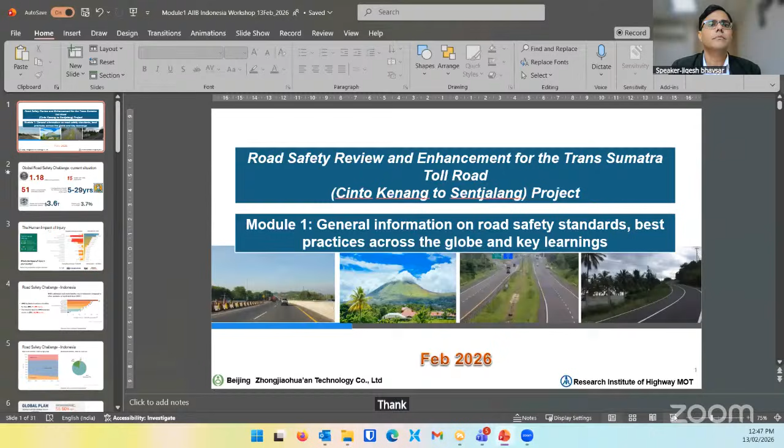Yes, thank you, thank you very much, and thank you for giving me this opportunity to speak. I'm going to share my screen. I hope you'll be able to see my screen. So I'm going to speak about general information on road safety and good practices around the world, mainly focusing on road infrastructure safety, but also touching upon other aspects of road safety, especially the safe system approach.

To start with, let me share with you the global safety challenge that we are facing. Every year, 1.18 million people die on roads because of crashes or accidents, as we know. That is about 15 deaths per 100,000 population. So 15 is the global average number per 100,000 people who die because of road crashes. That amounts to 51 million annual deaths and serious injuries. That's a huge number.

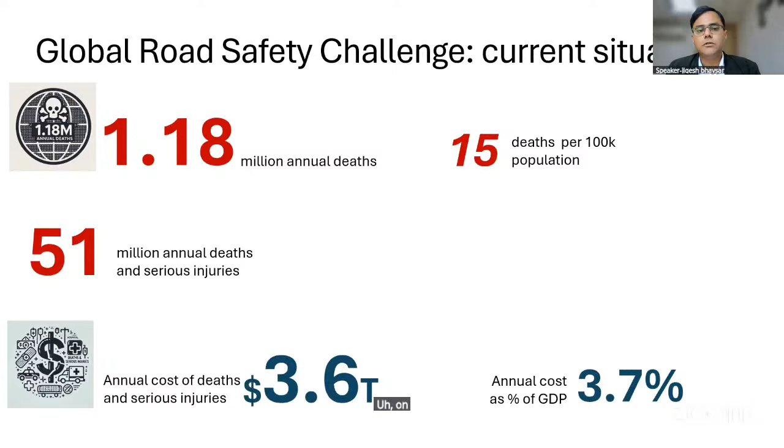These huge numbers result in about $3.6 trillion of losses, because people who die or get serious injury often end up in hospital. It becomes a burden on the health system, as well as the annual losses to the country in terms of GDP, etc. This amounts to a 3.7% loss of annual GDP on average to all countries, which is a huge loss to each nation.

However, the more worrisome figure is that road safety crashes are the leading cause of death for young people aged 5 to 29. So you can think of school-going children or young adults who just start earning in their early life being victims of road crashes. You can imagine the effect on the families. Often in low and middle income countries, this effect is more worrisome because there is a single breadwinner, and the whole family is devastated. That's the overall impact of road crashes every year.

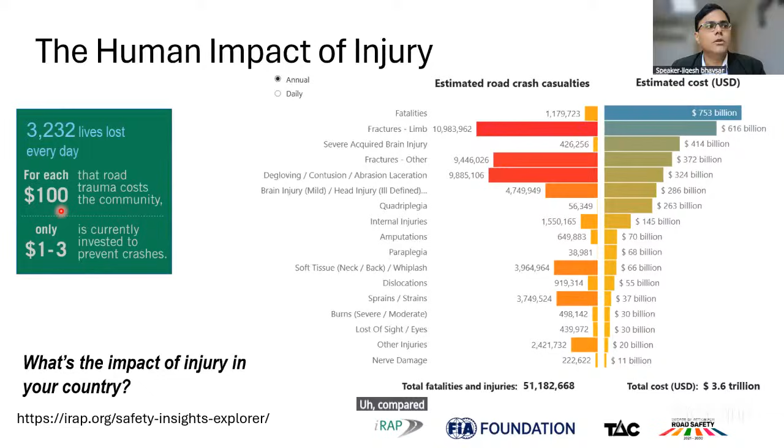On average, in all countries, for every $100 that is the cost to the community, we spend just $1 to $3 to prevent crashes, which is a very small amount compared to the losses. That's the global number.

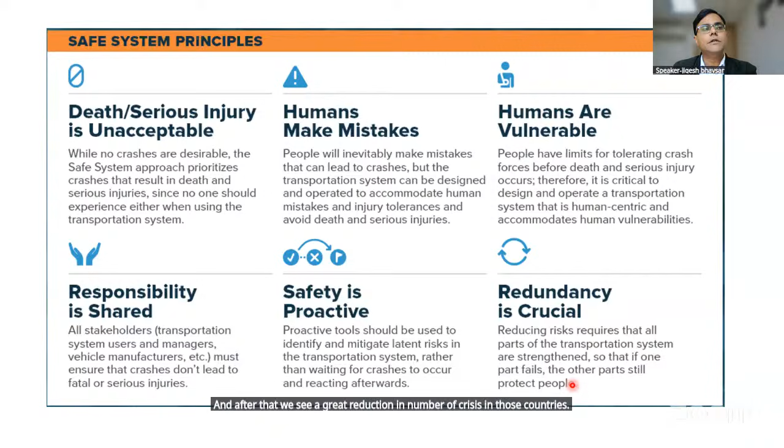So what the safe system approach basically says is that people are vulnerable and people make mistakes. We should not blame the driver for a mistake that he or she commits on the road when a crash happens. We should think that people are human, not machines - they will sometimes make mistakes. Even if we have good training of drivers, all sober drivers, not drinking, wearing seatbelts, etc., still people sometimes make mistakes, or there may be some other reason like bad weather, and a crash happens.

In such a case, how can we make sure that the outcome of the crash doesn't result into death or serious injury? Prevention of deaths and serious injuries on the roads, that is the focus of the safe system approach. There are multiple road agencies who need to work together, or often make a team and work together under the safe system approach.

So you can see safer vehicles with good vehicle technology, safer speed. We should first understand what is the safe speed for a particular road environment, and how can we implement safer road infrastructure. This involves police, road authority, and post-crash care, where when a crash happens, the victim must be taken to the hospital in a short time. So good ambulance system and trauma centers, the healthcare system, and safer road users, where drivers are trained properly through a good licensing system.

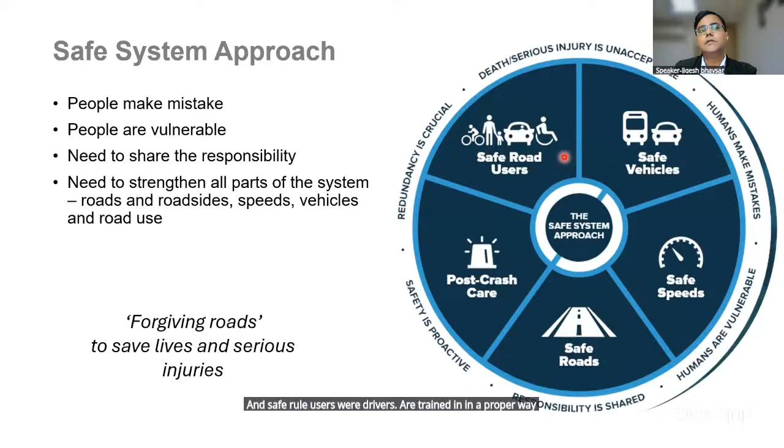All the people on the road who are vulnerable, bicycles, people on wheelchairs, etc., they are taken care of by proper road infrastructure, plus the facilities. So all these components work together as a team to avoid or reduce the number of deaths and serious injuries, and we need to strengthen all these aspects to achieve road safety.

As part of the safe system approach, we tend to focus more on a proactive approach. There are two basic approaches on road safety, particularly the engineering part of the road: reactive and proactive. Reactive is more based on crash data, or you might have heard about black spot programs. On a road, when more crashes are happening on a particular site, that is termed a black spot, and treatments or countermeasures are adopted to reduce or avoid the number of crashes. However, that is a reactive approach.

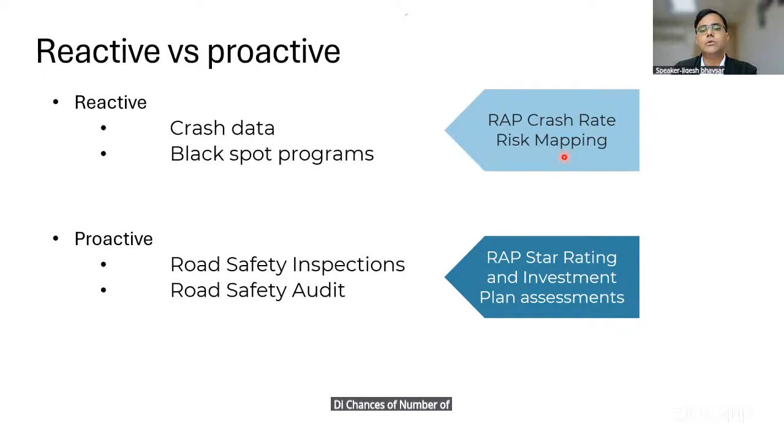The more proactive approach is road safety audit, road safety inspection, road safety assessment, where we want to make sure that a new or existing road has reduced chances of crashes by having systematic safety improvements.

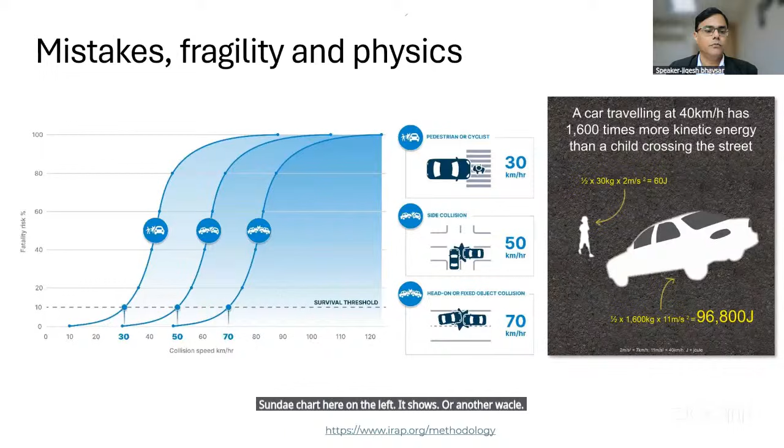Now, speed is a very important aspect when it comes to crashes and injuries. This chart on the left shows collision speed, at which a vehicle hits a pedestrian or another vehicle, and on this axis, fatality risk, the percentage chance of death. For example, a pedestrian hit by a vehicle at 30 km/h has a 10% chance of death, so 90% chance of survival.

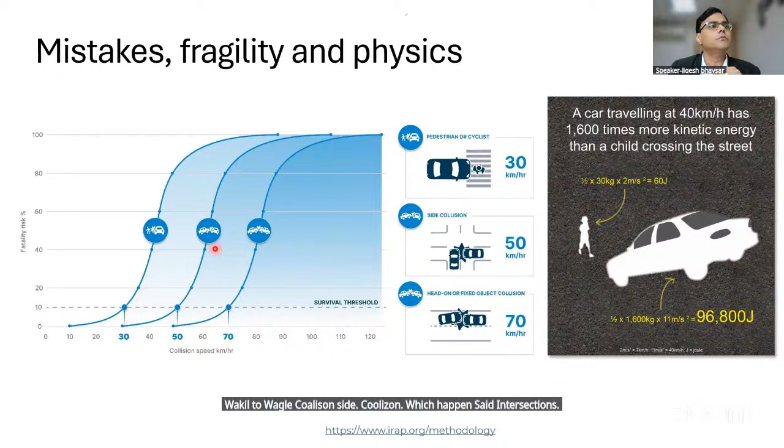At 40 km/h, about 40% chance of death. But at 50 km/h, the chance of death is very high, 80%, so very little chance of survival for the pedestrian. That's why when we have mixed use with no segregation of pedestrians, 30 km/h or maximum 40 km/h is a good approach. If we want higher speed, we'll need good facilities with segregation of pedestrians and vulnerable road users. For vehicle-to-vehicle side collision, which happens at intersections, at 60 km/h there's about a 40% chance of death.

At 70 km/h it is very high. That's why intersections are a very critical part of infrastructure. For head-on collision, 70 km/h is the limit; beyond 70, the chances of death are going to be very high.

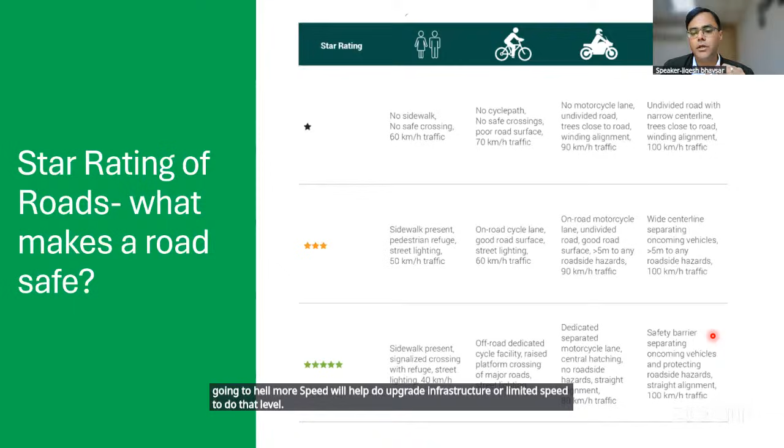For vehicle occupants, in a situation with an undivided 2-lane road at 100 km/h, it's a 1-star rating, which is very high risk. Whereas on a good road, like a motorway or a TSTR road, at 100 km/h with safety barriers between the two directions of traffic and also on the sides, it gets a 5-star rating, which is safer infrastructure. So based on the type of road infrastructure, we can say what speed is safe. If we want more speed, we'll have to upgrade infrastructure or limit the speed accordingly. This is a good indicator to help us understand what the safer speed is for a given situation.

Also, having good infrastructure data, a good level of infrastructure data, is very helpful. This is particularly from IRAP assessment in some countries in Europe.

So what it shows is plotting multiple layers of data, like where speed limit is more than 50 km/h, we have pedestrian crossing like the one shown in the photograph, at-grade pedestrian crossing, just a zebra marking, multiple lanes. You can see 4 lanes of the road, so pedestrians have to cross a very wide lane. 4 lanes is very wide for a pedestrian to cross, and it's undivided, so there is no refuge in between. So when you enter the road, you have to cross, and you can see here, the pedestrian probably cannot see if there is another vehicle approaching from this side.

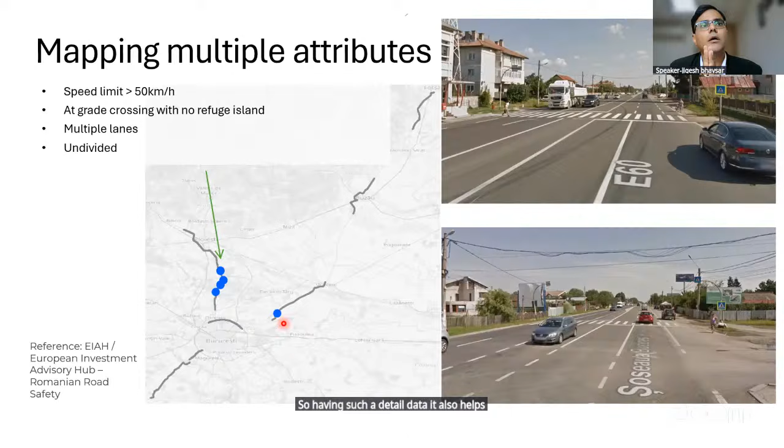That type of combination of high risk parameters helps us identify such high risk locations on the site. There are multiple other parameters as well, like curvature without signs and marking, and nighttime, which is going to be very high risk, particularly on high risk roads and so on. So having such detailed data also helps identify such high risk situations.

Now there are several international good practices available when we talk about safer road infrastructure. There's Austroads in Australia, DMRB from the UK, and PIARC, CAREC for the Central Asia region, and so on. What they talk about is not just geometric design, though that is obviously very important, but also speed management in urban or rural areas, plus the concept of roadside hazard management.

This is very important, particularly for high risk roads - the crash barriers and clear zone concept, etc. Also the process of risk assessment on such roads - UK and Australia have very good road safety audit guidelines, a systematic process. Also the safe system assessment framework is widely used in Australia. So we have some good practices available internationally, and these need to be adopted as a benchmark in addition to the national standards. Like in Indonesia, where national standards exist, in addition to those, we can look at such good practice available to make the road design safer, and operation also.

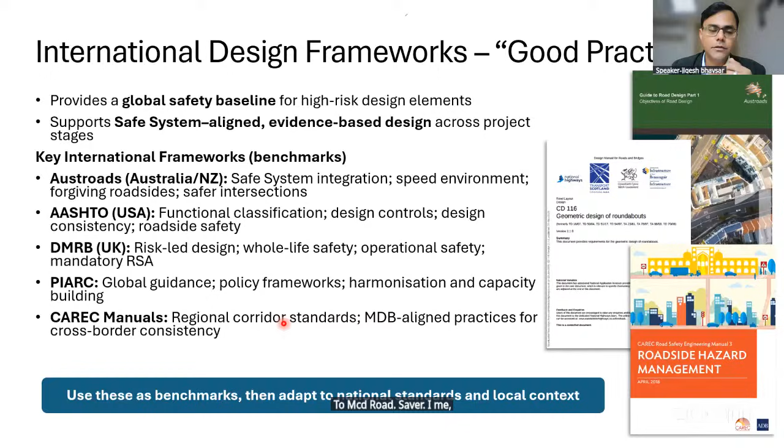Now, star rating of roads at the design stage - particularly what Han is going to talk about in the next module, star rating for design, SR4D. The Asian Development Bank has put together a good manual for the CAREC region, that is the Central Asian region, combining star rating for design and road safety audit.

So you know that when designs are being prepared, typically a road safety audit is conducted. The design goes through the process of road safety audit by an independent party. How can we complement this process with star rating of the road design? This is what this guide provides guidance on. There are 3 levels of integration possible.

Level 1 is very quick, where you have such cross sections from the design, and we can do star rating of such cross sections. Level 2 is full length star rating - the full length of the road based on the design drawings and documents. That is what we have done for the TSTR link under this study. Level 3 is star rating plus fatality estimation.

So if we do the existing road before improvement, full star rating, and then do design star rating, we can compare the existing road versus the design. This process, in addition to the road safety audit, is very good, and both complement each other, because road safety audit gives a more detailed perspective which the automatic star rating system may sometimes miss. Road safety audit is also a very good detailed approach, and under this study, we have done road safety audit as well. So that's a way how we can complement the process of road safety audit.

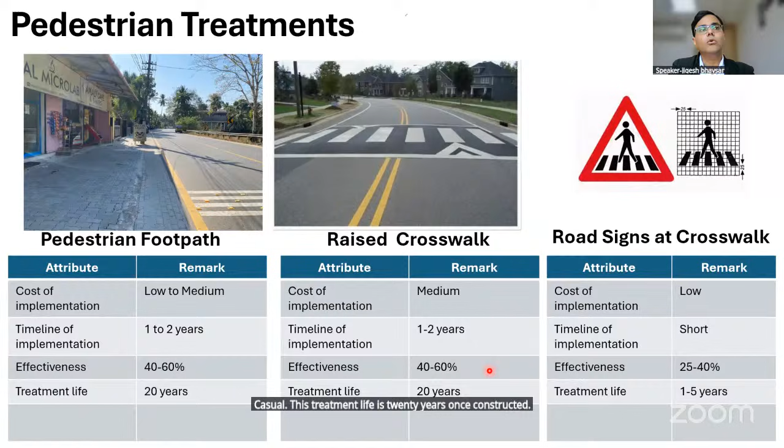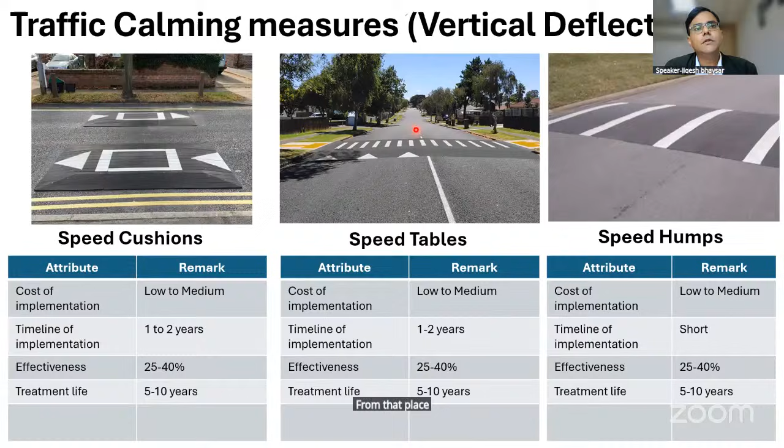Traffic calming measures include vertical deflection, where vehicles have to slow down to pass through, for example speed cushions, which allow bigger vehicles like ambulances and school buses to pass through without the hump. Speed tables make all vehicles slow down and go through, and as mentioned, pedestrians can also cross from that place. Speed humps are the traditional circular arch type.

Then there's the traffic calming measure in terms of horizontal deflection, where a road narrowing effect gives drivers the perception that the road is narrowing, so they slow down. There are certain gateway treatments with different types of markings and signs, giving a gateway effect so drivers know they are entering a village or urban area and need to slow down.

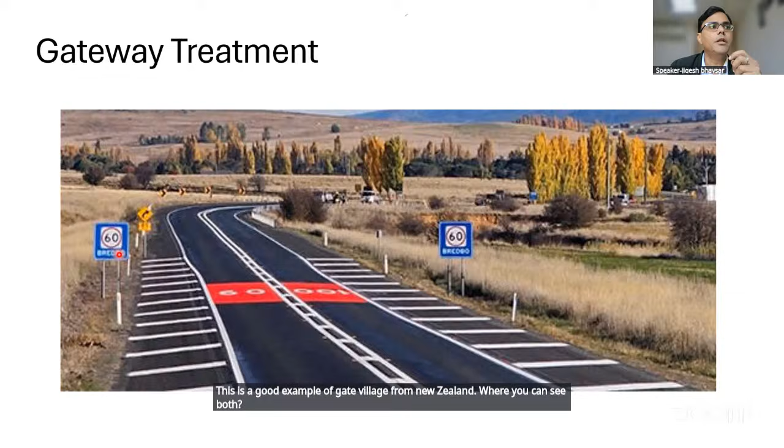This is particularly useful when a highway passes through a built-up town or village. We can also have a central island to create that slowdown effect. This is a good example of a gateway village from New Zealand, where on both sides you see the speed limit sign with the name of the town being approached, and speed limit also marked, telling the driver they are approaching a village or town and need to slow down.

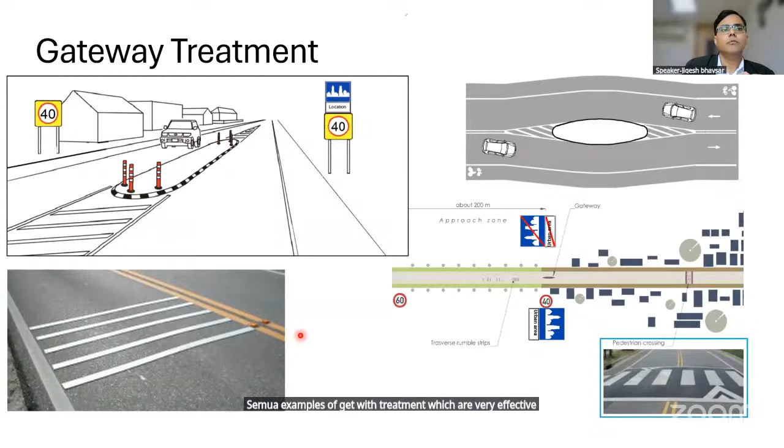Some more examples of gateway treatment, which are very effective when a high-speed highway passes through a village or town, having this kind of signage on both sides, plus a central island with rumble strips on the road, or different shapes of islands - that is very effective.

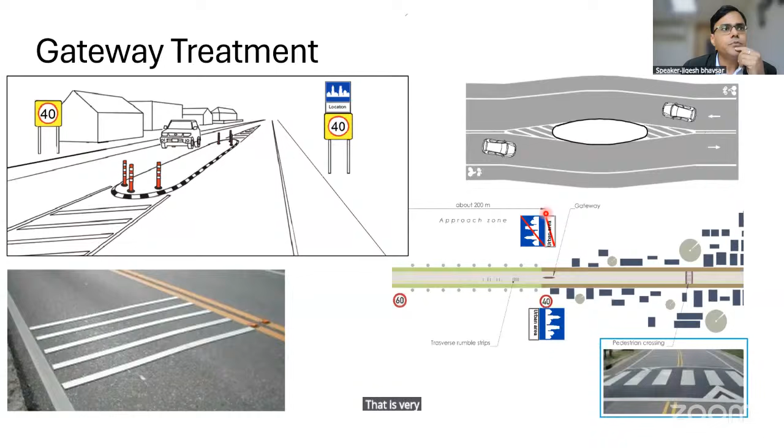Runoff crashes occur where more crashes happen when vehicles go off the road, and this is very serious on hill roads, where crash barriers can be very helpful to reduce them. Also, with good signs and markings, we can improve that situation.

Clear zone treatment, based on traffic volume, speed, and class of the road, requires a minimum width ranging from 3 meters to 10 meters where no hard object is present, so when a vehicle goes off the road it doesn't collide with such an object, improving the situation.

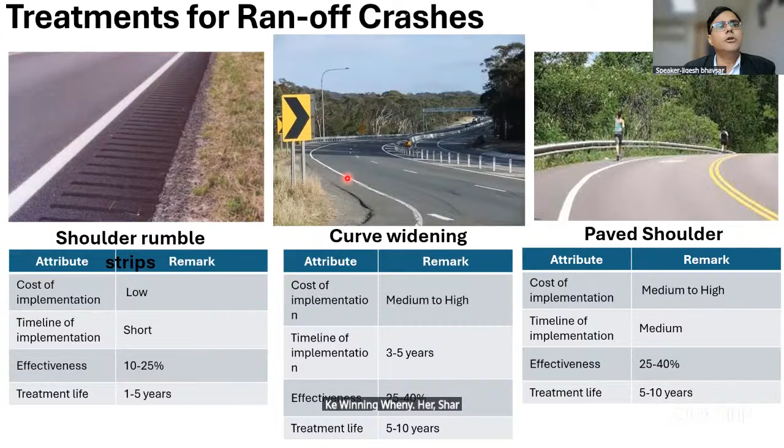Shoulder rumble strips are again very effective. Curve widening, when you have sharp curves, helps with a little bit of widening. Paved shoulders are very effective as well.

Treatments which help reduce head-on crashes when an undivided road has vehicles traveling in opposite directions include different treatments like center line rumble strips, and climbing lanes on hill roads so faster vehicles can use that extra lane to overtake slower vehicles. Good center line markings are also helpful, and there are a variety of center line markings.

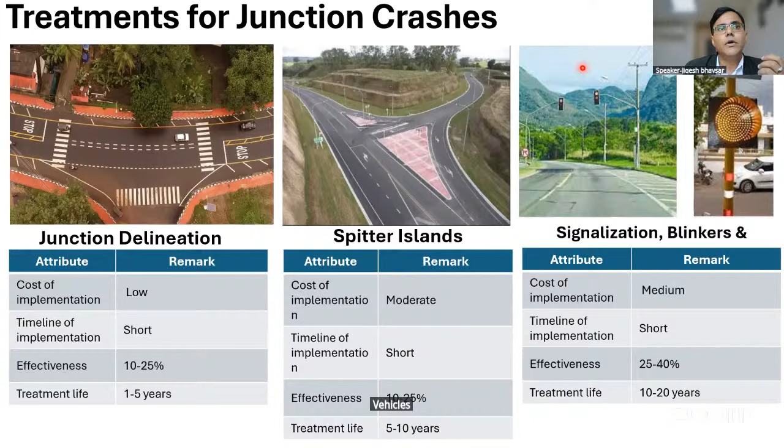To improve junction safety, channelizing is very important - you can see the markings and channelizing islands at the intersection that help regulate movement and reduce conflict between turning vehicles. Signalization is very helpful, and blinkers alert drivers in advance that they are approaching an intersection. Roundabouts are also very important and reduce conflict by a great amount, so having roundabouts on highways and in urban areas is very helpful.

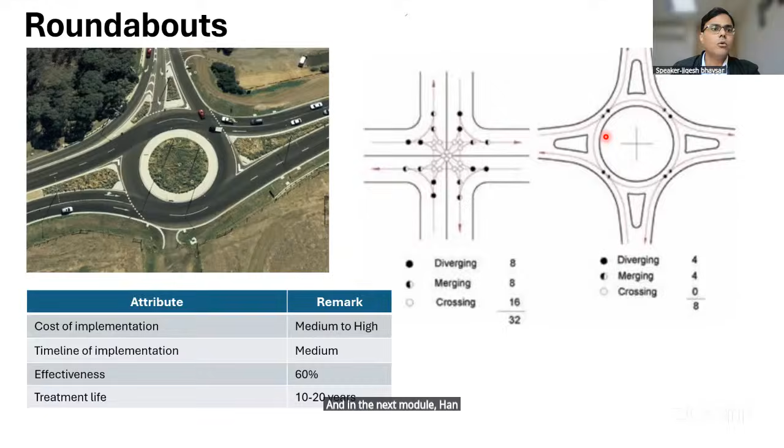These were some of the good practice solutions I wanted to share with you. In the next module, Han is going to talk more about how we have assessed the risk on the TSTR link design and given solutions using the road safety audit and star rating for design approach. Thank you very much, any questions? I'm happy to answer.

So on module 2, I'm going to talk about the project specific discussion on the design review and compliance, gaps and mitigation measures for the road safety review and enhancement for the Trans-Sumatra toll road from Cinto Kenang to Sentjalang project.

The scope of this link 15 is about 198 kilometers from Jambi to Rengat. The objective is to review the detailed engineering design for road safety provisions and provide recommendations to enhance road safety aspects. The methodology used is what was just discussed: the International Road Assessment Program.

The IRAP star rating for design, SR4D, also incorporates the road safety audit RSA methodology of the DED, to achieve Indonesia's MPWH Regulation Number 4, 2023, that mandates a minimum 4-star IRAP star rating, safety rating for all national roads and expressways.

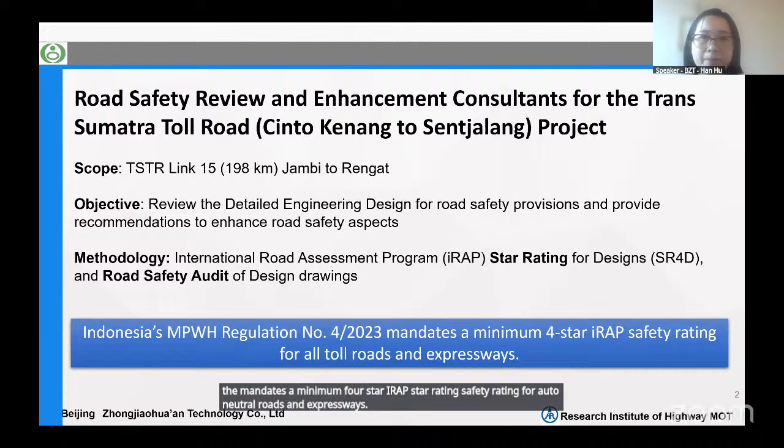Let's take a look at the entire stretch of the road. There are 4 interchanges from Cinto Kenang to Rengat, and there are 4 lanes, 2 lanes in each direction, and the total typical road width is 25.9 meters.

That comprises a lane width of 3.6 meters, 1.5 meter inner shoulder width, and 3 meter outer shoulder width, with 2.6 meter median width, including the median barrier width.

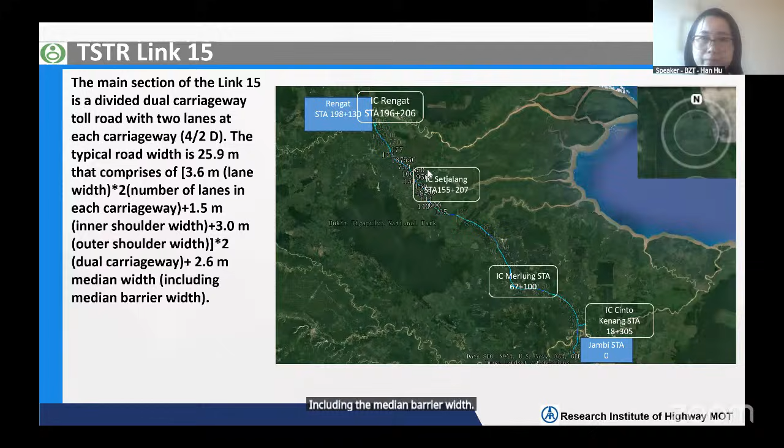So what we have done is, first we implemented the road safety review of the DEDs. The workflow is we took the data of the TSTR link 15 DED and other reports, done the pre-audit checks, checked the status of work and road functions, and then reviewed road safety aspects to review the road safety design features and identify the potential safety issues.

And then we formed the road safety review report, listing all the safety concerns with the level of risk and the priorities, and then recommendations to mitigate the risk.

After that, we provided the review report to our clients, and then met with the project manager and designers, the PTHK, to discuss the safety concerns and recommendations for them to change, and how these measures will be implemented in their design improvements.

After that, we implement the SR4D work procedures, which I have introduced before. We circle this, and then we have the target that is the 4-star rating to optimize the star ratings of the entire road stretch to reduce the deaths and serious injuries, since even new roads can probably cause potential fatalities if we don't design them properly.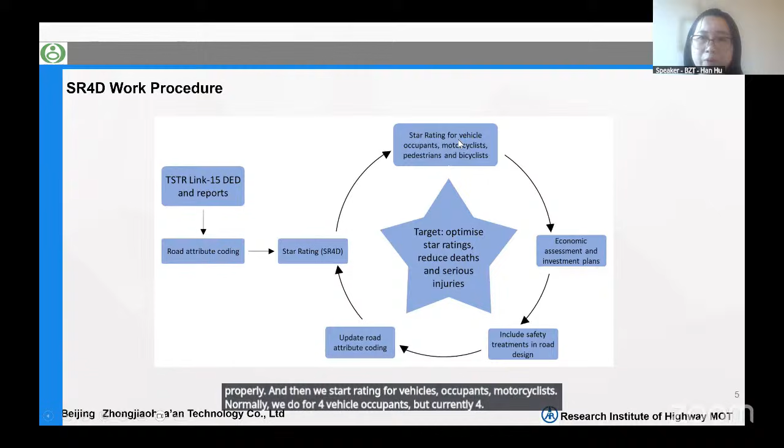And then we star rate for vehicles, occupants, motorcyclists. Normally we do this for 4 vehicle occupants, but currently four groups of road users. For this project, we only do the star rating for the vehicle occupants.

And then we implemented the economic assessment and investment plans, including safety treatments in road design, and then update the road attribute coding, forming this entire circle. We call it SR4D.

So the SR4D road attributes coding includes the roadside, mid-block, intersection, flow, and vulnerable road users, facilities, and land use, speeds, and extras.

So for roadsides, for example, we code the roadside objects and their distance to a road lane, and then the paved shoulder width, paved shoulder rumble strips, and whether they are available.

And for the mid-blocks, the attributes we usually code are the numbers of lanes and lane widths, whether there are any service roads, the curvature and quality of curvature, the grades of the roads, the slope, median type, center rumble, skid resistance, parking space, sight distance, and lighting.

And for intersections, we code the intersection type, the quality of the intersection, channelization, intersecting road volume, and also for flow, we code the annual average daily traffic and peak hour flow, pedestrian along and cross flow.

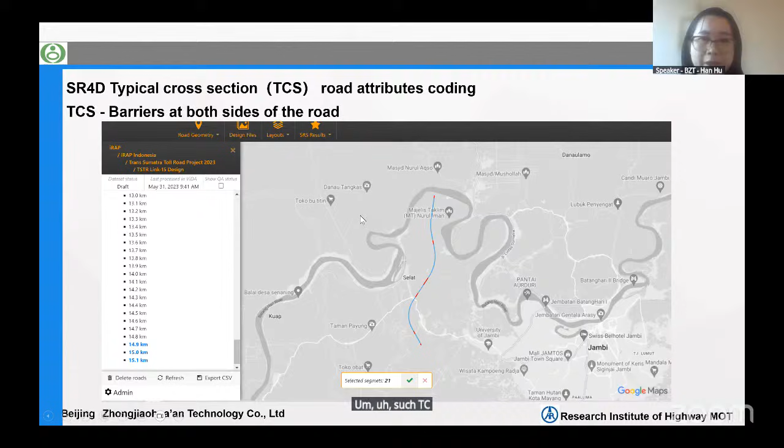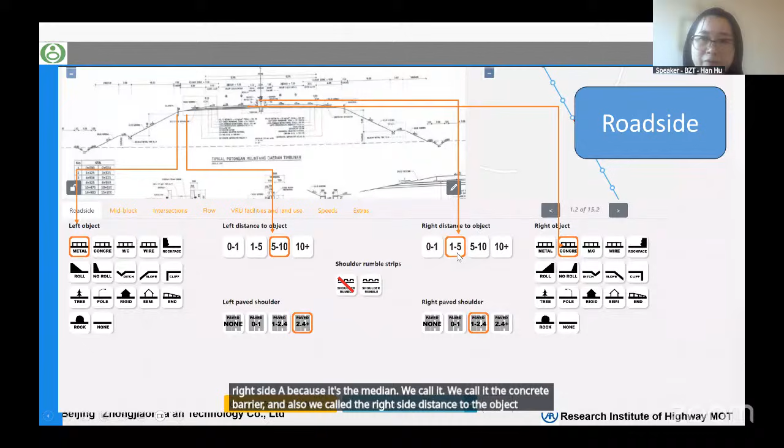In the roadside group, we coded the roadside left object as the metal barrier, with left side distance to this object being 5 to 10 meters. We also coded whether there are shoulder rumble strips. For the right side, it's the median, coded as concrete barrier, with right side distance to the object at 1 to 5 meters, and the right side paved shoulder at 1 to 2.4 meters for this typical cross section.

For the mid block of this typical cross section, we coded the number of lanes, and lane width as wide, curvature as straight, and curvature quality as not applicable. The median type is concrete, and skid resistance is sealed since it's a new road, representing good condition. Parking is coded none, grade is 0 to 7%, road condition is good, there are no roadworks, sight distance is sufficient, there's no service road, delineation is good, center rumble strips does not apply, and lighting applies here.

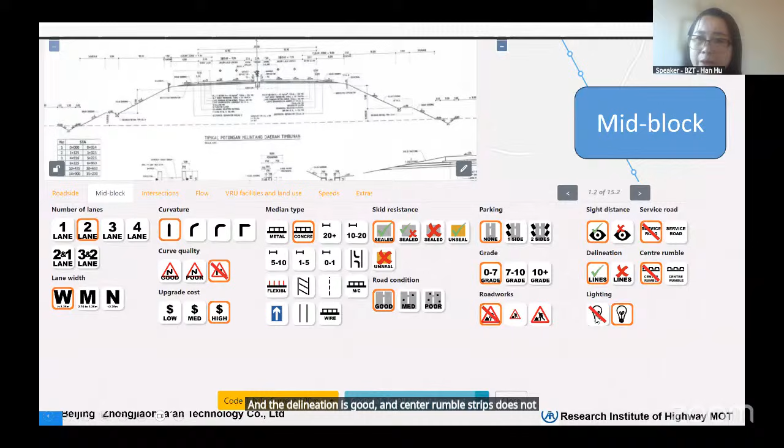For the intersection here, there's no intersection at this part, so all these attributes are not applicable.

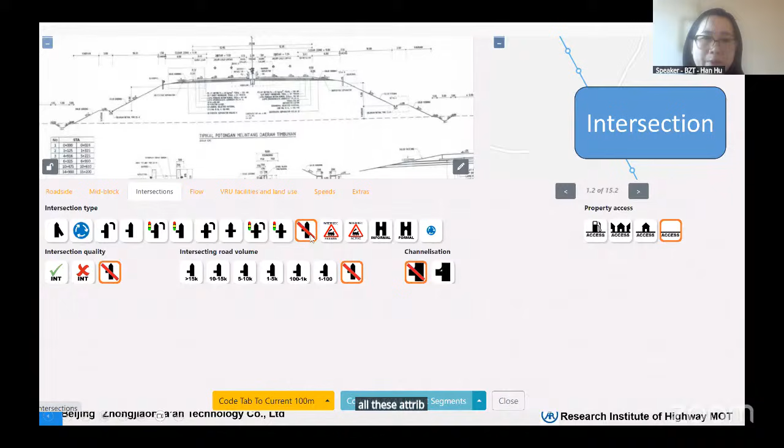For the flow here, because it's a toll road, there's no motorcycle and no pedestrians, no pedestrian crossing flow, no pedestrians walking along the road, and also no bike flow.

We use this AADT as we got the basic concept design from the PTHK that they provided us. We use 5,791 vehicles as the AADT.

The AADT represents the exposure of how many vehicles are exposed to this traffic. If it's a large number, that means more exposure and more risk that the vehicle occupants are facing on these road sections. So it often will influence the results of the star rating and the safer road investment plans, as it will generate more fatalities.

For the VRU facilities and land use here, since the left-hand side land use is pure farmland, we code there's no sidewalk and no crossing on this inspected road, and no crossing at the side road, and obviously no sidewalk on the right side. There's no motorcycle facilities on these toll roads, the area type is farm, and there's no crossing facilities for vehicles, no crossing facility quality, no fence, and for bicycle facilities and school zone, these are all the attributes.

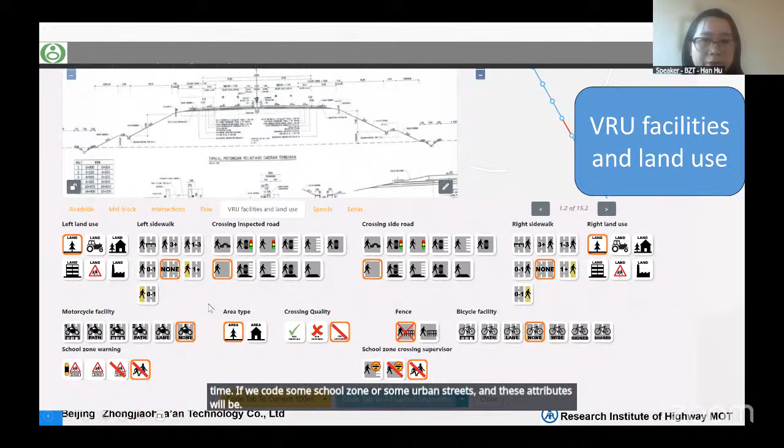We have a summary table of the TCS, particularly for barriers at both sides, because in most cases on this TSTR link 15, both sides have barriers. For the driver's side objects, it's a concrete barrier at 1 to 5 meter distance. For the passenger side objects, which is the left side, it's a metal barrier at 5 to 10 meter distance. The paved shoulder width is wide - at passenger side it's more than 2.4 meters, and driver side is 1 to 2.4 meters. There's no shoulder rumble strips.

For the mid block, the median type is divided road with a concrete barrier at the median. There are 2 lanes each carriageway, curvature is gently curving, delineation is adequate, and lighting is yes. For intersections, there's no intersection, and the flow info is 5,791 AADT. Land use is undeveloped, speed limit here is 100 km/h, and operating speed at this section uses the 85th percentile speed of 110 km/h. Speed management here is nil, and speed differential here is nil.

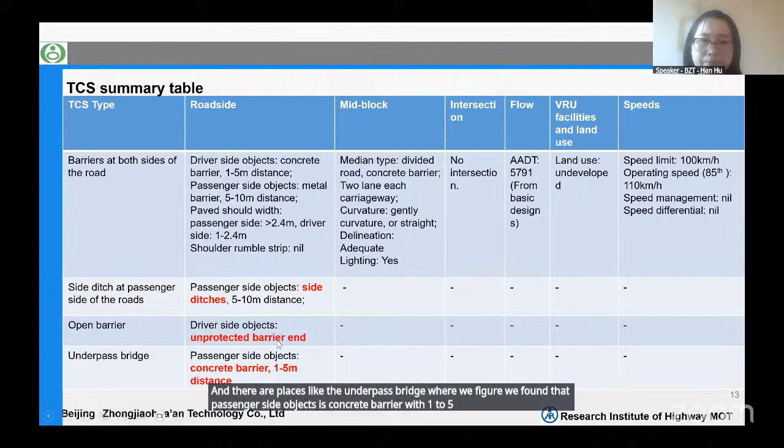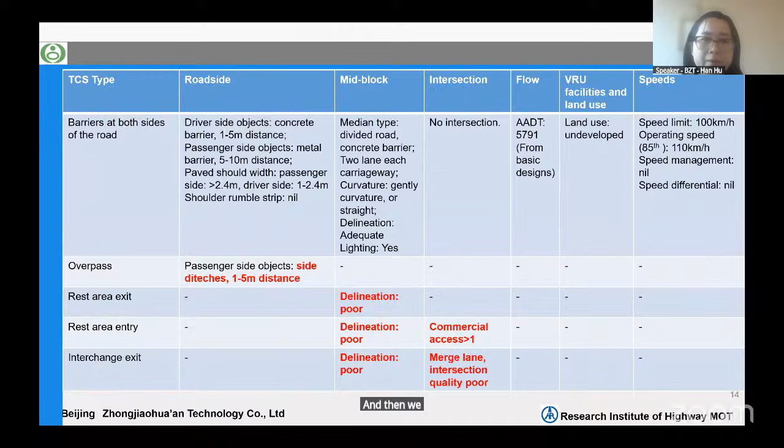This is the summary of the TCS, the typical cross sections of the entire TSTR link 15. We implement these inputs into the TSTR link 15 design review, using iRAP's star rating for design method, including safety treatments in the design. The output will be the revised and safer design with a 3-star or better rating.

The safer new roads should be constructed, and the outcome should be the reduction in deaths and serious injuries, with the impact being long-term economic benefits and less burden on the health system.

As introduced, the UN's road safety goals involve public health, law enforcement, and road authorities. So we, as road authorities and designers, have to fulfill our obligations.

Our design must make it possible to identify safety treatments or improvements under multiple options of available investment plans. We calculate that the economic benefit of the safety treatment must at minimum exceed the cost of its construction and maintenance—that is, it must have a benefit-cost ratio, the BCR, greater than 1.

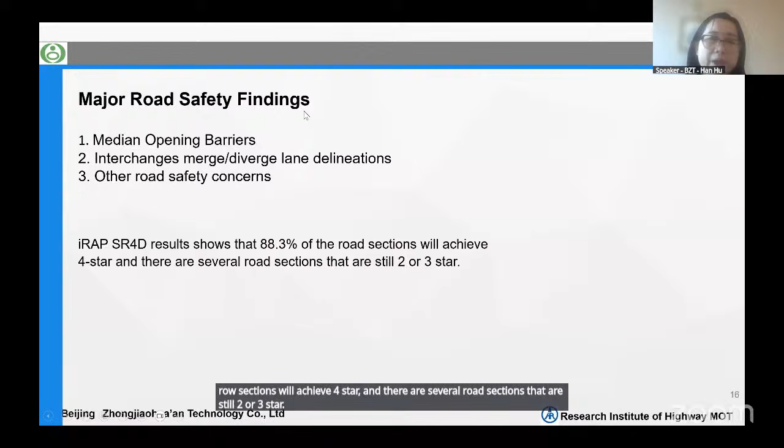For the median openings identified in the previous TCS analysis as barrier openings, these serve as U-turn provisions for emergency vehicles. In the current design there is a collapsible barrier in the median, and there are about 31 such openings over the 198 kilometer road length of TSTR link 15.

The collapsible barrier in the present design is a concern for road safety, as in a high-speed collision it will generate runoff crashes and the vehicle may cross to the other side. These collapsible barrier ends connecting with the concrete barrier in the median are not safe for high-speed collision, and there are 31 such U-turns across the 198 kilometers.

An example of the star rating analysis for this median U-turn, median opening for emergency vehicles: the operating speed is 110 kilometers per hour, which gives a 4-star rating, but the driver's side object, the unprotected barrier end, makes it 1-star or worse.

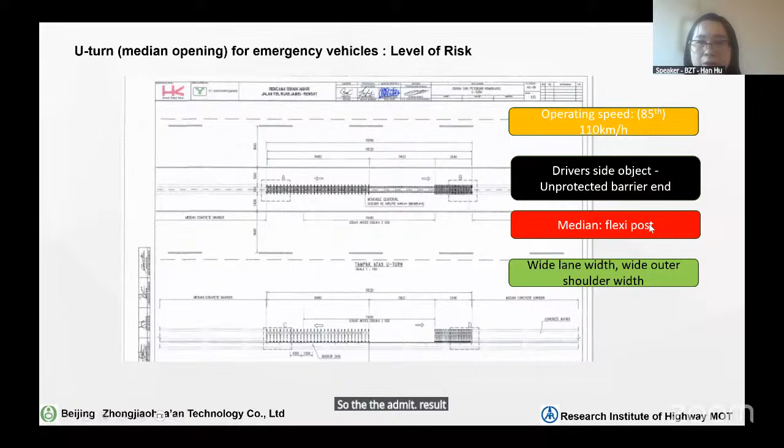The median flexi-post makes it 2-star risk, while the wide lane widths and wide outer shoulder widths provide clearance making it 5-star for those sections. So the ultimate result of this cross section is 2-star.

For the interchange merge and diverge lane delineations, signings, markings and visibility, we identified that for rest areas and interchange exits, directional signs should be placed at 2 kilometers, 1 kilometer, and 500 meters. The current designs use intervals of 1 kilometer and 500 meters.

A second issue is that we should install wet reflective markings and rumble strips to improve lane discipline in rainy and nighttime conditions, and adopt a graded speed limit scheme, reducing speed from 100 km/h to 70 km/h, then to 40 km/h, to safely transition drivers into the divergent lanes at interchanges.

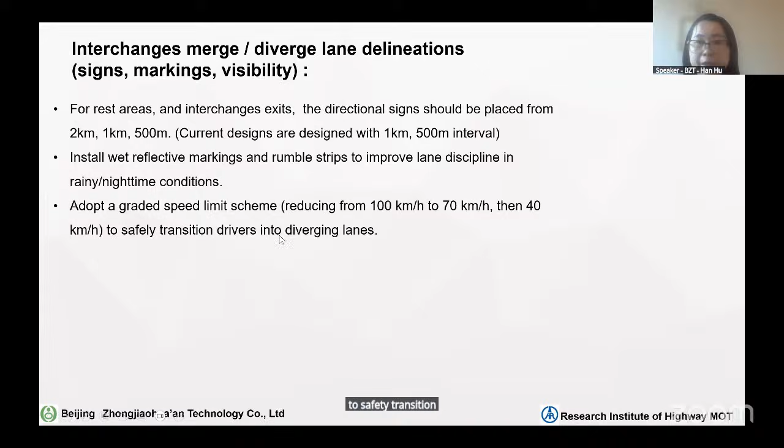Regarding the risk level of the interchange merge and diverge lane delineations for signs and markings, here's an example: the operating speed is good, but the divergent place—the intersection diverge lane and poor channelization—has what we call poor delineation. The good part is that roadside barriers on both sides of the road are designed, with wide lane widths and wide shoulder widths.

And this is the star rating map of the TSTR Link 15, Jambi to Rengat, for the vehicle occupants. On the left side, you see the smooth star rating, where 4-star is 99.2 percentage of the road length.

And then on the right side is the raw star rating, which only 88.3% of the road length is 4-star, and there are the rest of the sections are 2 or 3 stars.

So what we mean by the smooth star rating is we merge the homogeneous sections of the road, each 100-meter road sections, so that there are probably some sections that are 3 stars, but the adjacent homogeneous sections are 4-star or 5-star or better, and then the smooth stars will be 4-star.

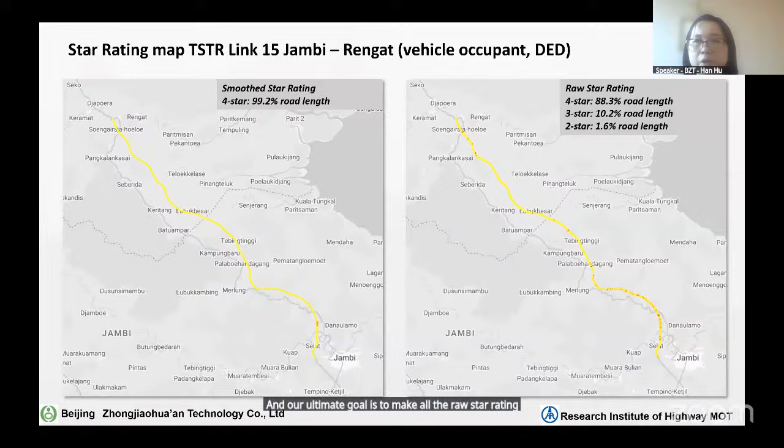So the safety concern here is opening for emergency vehicle access, and the recommendation is to adopt a safer barrier type. There are about 31 sites.

And the second issue is the merge and diverge lanes of the interchanges, to improve the signs and markings and also the crash barriers. There are 8 sites. And also speed enforcement, and if there is any possibility to make sure the places are well placed with speed cameras.

And this will show that the current DEDs, the star rating that you have seen, there are about 10%, 12% of the roads are still 2 or 3 stars in terms of the raw star rating.

And with our improved recommended treatments, we can eliminate the 2-star ratings here. But still, there are road sections that are still about 10% of the road in 3-star ratings.

But if we can add some speed enforcement, we can make all the road sections for the smooth star ratings 100% 4-star ratings, and for raw star ratings we make it 99% of the road sections into 4-star ratings. That's almost 100% of the length achieving 4-star ratings or better.

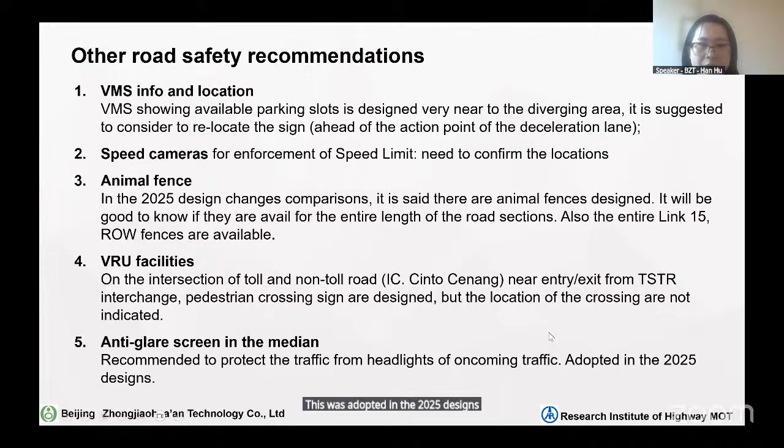And we also recommended for work zone safety, we should shift to a safe system and risk-based approach, and adopt the CAREC 6-zone work zone model, from early warning to advanced warning and taper and mandatory safety buffer, and then work area and then termination.

And also the hierarchy of controls, engineering first to eliminate risk where possible, to improve the crashworthiness of the barriers and also the TMAs, and also the administrative controls.

And for mandatory speed management, 40 kilometers per hour in active work zones is mandated. And from a step-down speed reduction, 20 kilometers per hour increments of this step-down speed reduction. We also encouraged automated enforcement and regulatory speed signs.

For the positive protection of workers, we recommend adopting MASH and also EN 1317 compliant barriers, and also for TMA, truck-mounted attenuators are mandatory on high-speed sections, and water-filled barriers are for delineation only, they are not for protection.

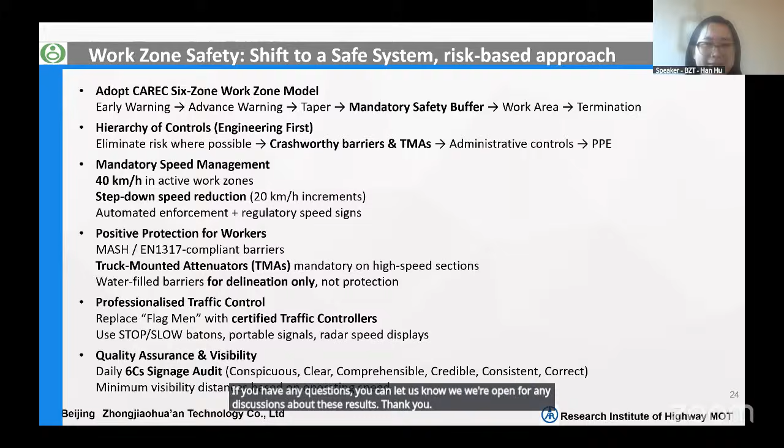Okay, thank you, Ms. Han Hu. Okay, thank you for the presentation. Maybe Ms. Han Hu's mind is on the Chinese New Year, yeah, Ms. Han Hu. But now we will have a discussion session. Is there anyone to raise your hand to have a question or statement?

If not, maybe I will read the question from the chat. Maybe Ms. Han Hu or Jikes can answer this one.

First discussion is about the motorcyclists. Given that motorcyclists represent the largest proportion of road crash victims in Indonesia, and that toll roads exclude motorcycle traffic, should national road safety strategies prioritize intervention on non-toll urban and arterial roads over toll road upgrades? Do you have any comment, Pak Jikes?

Yes, I can answer this one. Good question, because when we say that 80% of the deaths happen with motorcycles, why don't we just focus on motorcycles? However, I would like to say that it should not be seen as a prioritization where we take action. I think the National Road Safety Policy also says that on toll roads, the fatality rate is more than non-toll roads. What that means, if 100 crashes happen, how many people die?

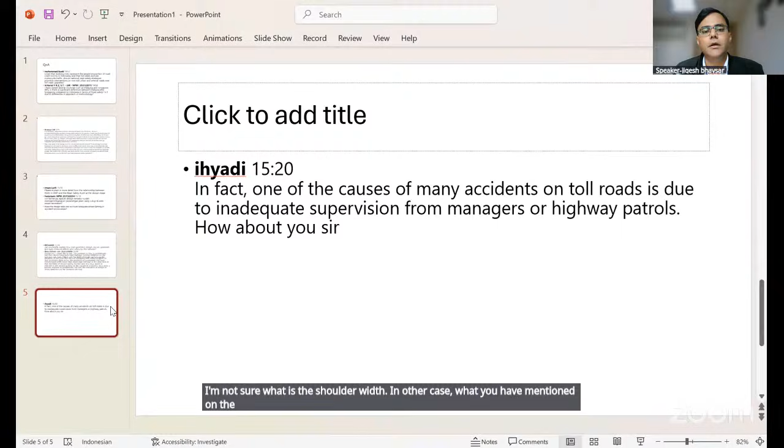Okay, next question. Please explain in more detail the relationship between RS4D, iRAP, and the road safety audit at the design stage. This is new for us, starting road safety audit. We already use what Han explained, we saw before, like the iRAP demonstrator, right? The iRAP demonstrator is similar to RS4D, but how about the road safety audit? It is new for us.

Can you explain? Yes, so in simple terms, a road safety audit is when a road safety auditor reviews the design drawings and then gives recommendations or observations, but there is no quantification of risk. So when I look at a design drawing and say there is some risk here, how much is the risk? That I cannot tell. When I say you need to change these features to improve safety, I cannot tell what level of safety improvement we are going to bring.

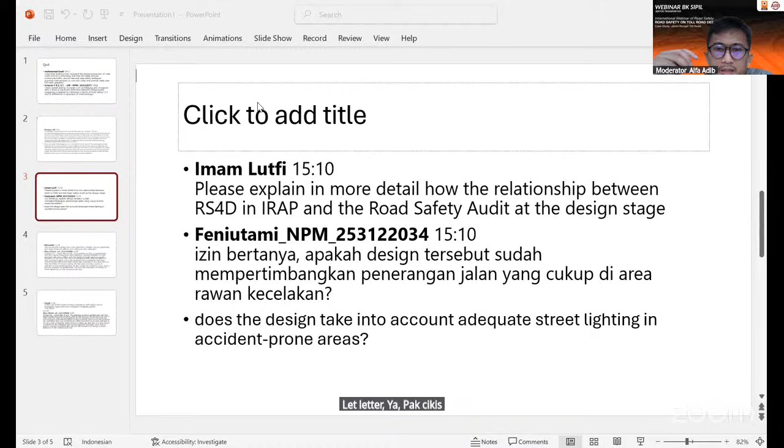I think this topic is very interesting—maybe we will discuss it later, Pak Jigesh. In Indonesia we already use star rating, but with a different approach compared to road safety audit, because for star rating a junior engineer can do it, but for road safety audit it should be an expert with long experience.

Next question: does the design take into account adequate street lighting in accident-prone areas? About lighting, do you have any comment?

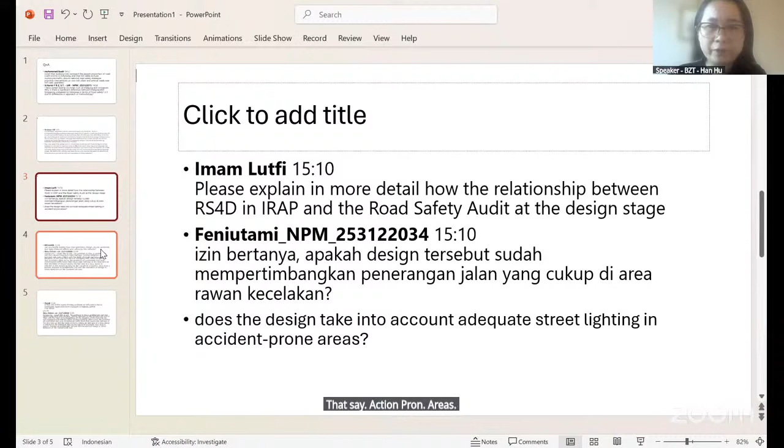I think the entire sections are designed with sufficient lighting according to our observations of the designs, and there are not so many accident-prone areas, given that the design and alignments are good.

Jigesh, maybe you can also make some points? Yes, streetlight, I think these are present. However, when we talk particularly about the star rating model, streetlight gives benefit to pedestrian safety. So if we think about two cars and their risk, streetlight versus no streetlight, in star rating it's not considered—it is the same. But when you have pedestrians and compare streetlight versus no streetlight, there will be a difference in pedestrian safety rating. So streetlights are no doubt important, and perhaps you can say that's a limitation of the star rating model.

But in reality, streetlights are helpful. Also, sometimes on high-speed roads, I have seen streetlights introduced in some sections to break the monotony of driving, particularly at night—not on the entire road, just some sections. And if there is a known history of crashes on certain road sections at night time, probably having street light will help address that situation.

Okay, next a short question from Pak Richard, but maybe the answer will be long. Can you briefly explain how road geometric design, such as curves, gradients, and sight distance, affects user safety for this toll road?

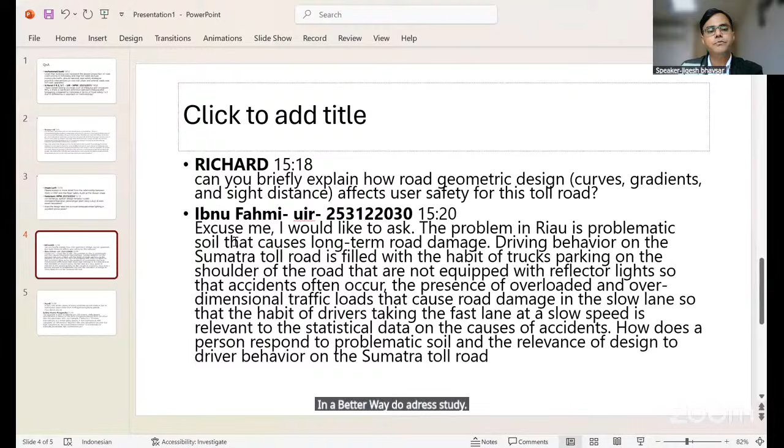I also want to add a point. Although I'm not a pavement expert, I have some working experience on this topic. Have you tried, using the AASHTO design method, or your local Indonesian pavement design method? Sometimes other countries' design methods may not apply to your case, even if the road is properly used with no overloading, because of local conditions of materials, availability, and lab tests, other combinations of pavement design can be applied. We can discuss later to see if your materials using other design methods can achieve better performance. That's for your reference, some suggestions.

So the code should be tailored to the Indonesian situation, right? Yes, recently our institute has worked with a lot of other countries abroad on topics of road pavement and design. We have a big lab here, and we recently helped other countries test their materials, because that country adopts AASHTO methodologies, but the performance of the pavement doesn't achieve what they want. So we said maybe you don't have to always listen to the CBR or AASHTO method.

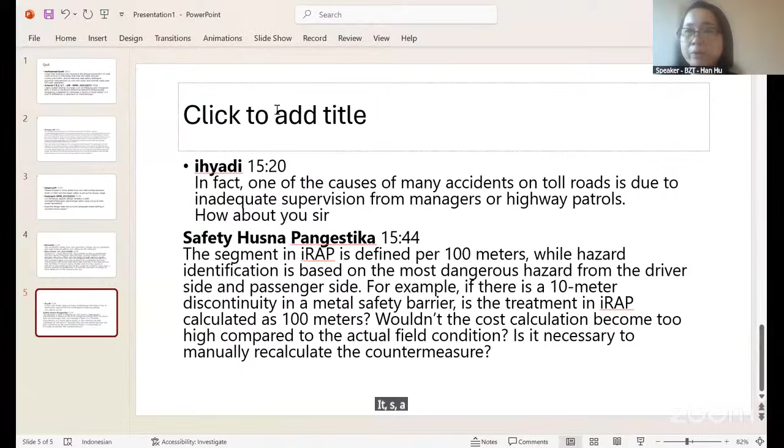You can try to let them give us their materials. So we imported their aggregates and asphalt, and helped them use other design methods to improve their aggregates, like the compositions of the aggregates. By doing that, the performance of the road pavements was achieved. I'm not an expert, but I talked to the leaders about what they achieved, and they said this whole situation is global, so maybe one method cannot fit all cases. Each country has their own issues and situations to think of. This is the suggestion from me.

Okay. Next question from Ihyadi. In fact, one of the causes of many accidents on toll roads is due to inadequate supervision from managers or highway patrols.

Yes, I think... your recommendation is basically about the road pavement, road inventory, or the physical road. But actually the accident factor comes from the physical road, the vehicle, and the user. In your recommendation for the Jambi Rengat road, is there any recommendation related to enforcement or speed control and something like that? Do you have any response?

Yes, we have recommended speed enforcement in the star rating for design. We have done a scenario - Han can correct me - we assumed or adopted 110 kilometers per hour as the 85th percentile speed, with a speed limit of 100 kilometers per hour. But without a good enforcement system, because this road is going to be very nice which encourages speeding, people will generally drive 10 kilometers per hour above the speed limit. So we modeled that if people drive at 110, what is the safety outcome, star rating, etc. Then reducing it by 10 kilometers per hour with a camera system for good enforcement, what is the improved star rating? So this kind of analysis is possible using the star rating model.

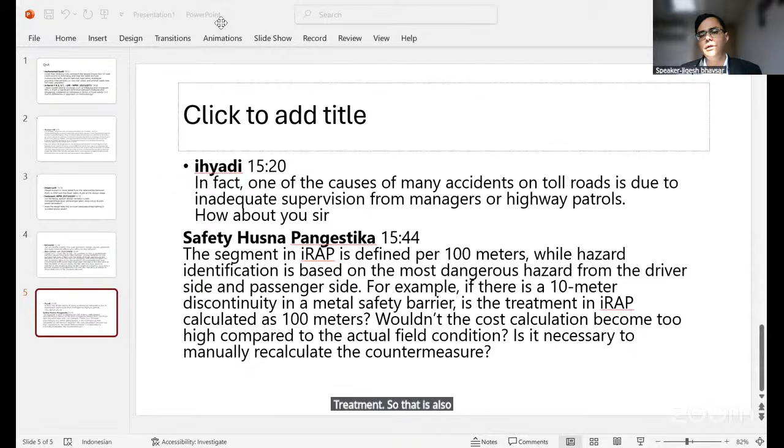I think that IRAP, or the star rating for the road, is good enough, but to plan the investment and the design, we still need the real road engineer to calculate the measure, to draw the measure, to design the real measure. So it's only for the projection, for fast calculating, to pre-calculate the investment. That's right.

Is there any question again for the audience? Okay, can I ask for a minute, Mr. Radit? Okay, Pak Wahyu. To Mr. Jigesh Bhavsar, I want to know what percentage the maintenance costs are cheaper in Indonesia, Malaysia, and Singapore, and how you can compare between the three countries about that, and how to handle that. Thank you.

Okay, please. I'm not sure I have understood it fully, but maintenance cost and construction cost are going to be different in different countries. If your question is particularly about IRAP star rating and investment plan, the unit construction cost, there is a long list of about 94 safety treatments, and we have detailed construction costs. For each country, that has to be modified to suit the local condition, like what is the construction cost of a crash barrier in Indonesia versus Singapore, which will be different. That is one of the inputs we have to give to the model to prepare the investment plan, and that is how the investment plan actually reflects local conditions. The cost, benefit, everything reflects these local conditions. I hope I have answered your question.